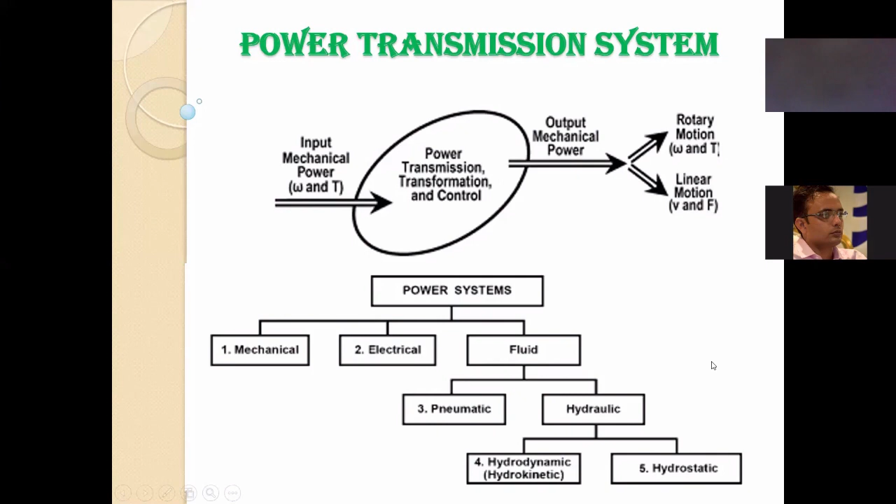We reach the differential, and from there the wheel turns. This is mechanical power transmission, from mechanical to mechanical.

We are getting mechanical energy by combustion of fuel in the internal combustion engine, getting power which rotates the wheel, and we get mechanical motion. We are getting rotational motion, and in the engine we are getting reciprocating motion.

Power is inputted and we get mechanical output through this. So power is transmitted this way, completed totally with mechanical power. This transmission of power is called mechanical power transmission.

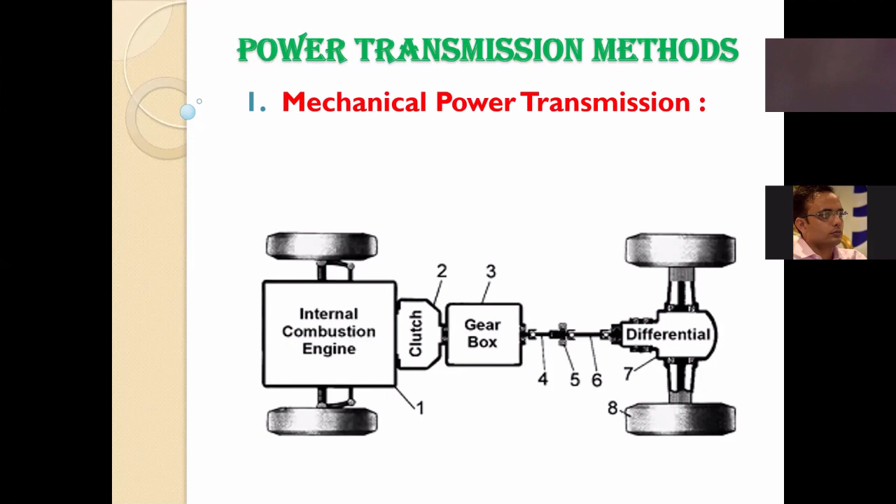Most of us as participants know about what happens in a power plant. After generating power in the power plant, electricity is generated, then transmitted to other sources via wires and power cables, entering into the industry or any powerhouse.

From that electricity we rotate a generator, we rotate a motor, and from that electric motor we do some mechanical work. So from electrical power energy we get mechanical energy.

Power is transmitted through various processes, from electric motor, from electric generator, transmitted through cables and enters your factory, and from there into your electrical motor, then transmits to the machine, and you get some mechanical work. It may be rotational or reciprocating.

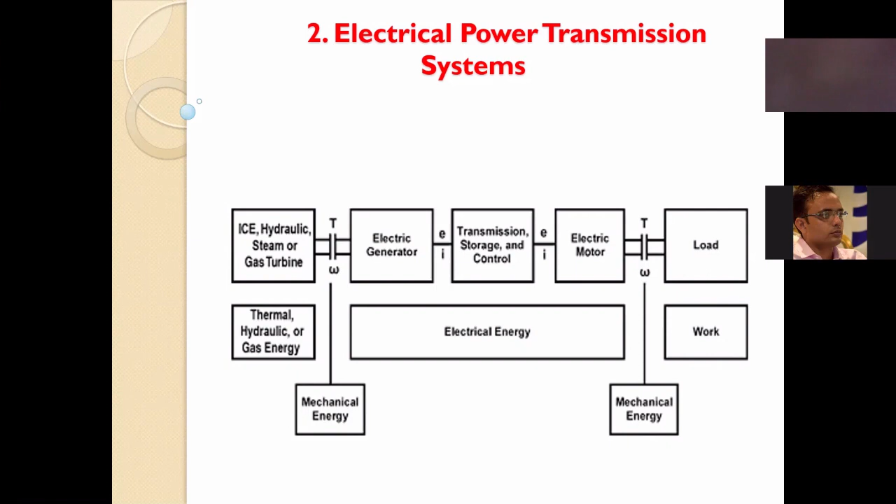This is the transmission of electrical power system, from mechanical to mechanical but via electrical power system. So next one, please.

Then the cylinder moves, giving mechanical work to lift some load, or some rotational motion like a drilling machine, pneumatic drilling, pneumatic brake. So it is doing some mechanical work, but what medium are we using? Air. Air is our main medium.

In the case of the hydraulic system, we are using a hydraulic pump. The rest of the things are the same, but the content of the system has changed from air to hydraulic oil. For oil we use a pump, and for air we use a compressor. So here the electric motor is the prime mover. The motor gives the prime rotation, then we pressurize the fluid.

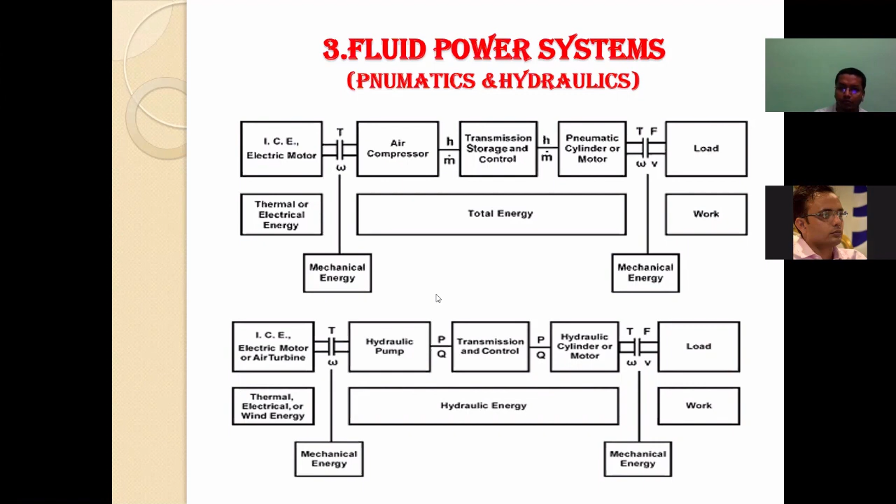Next slide please, sir. Okay. Previous, sir. Okay. So, next one.

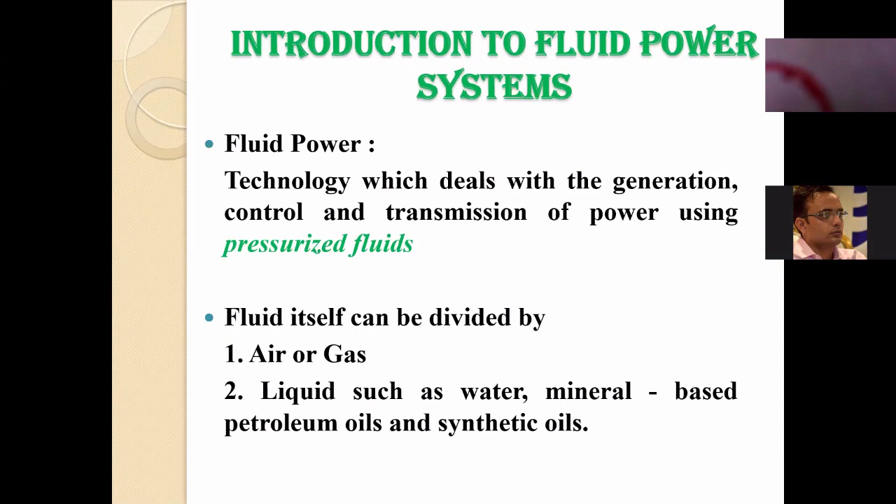Now, which law is behind this fluid power system? We all know Pascal's law. Each and every one knows Pascal's law. We all know pressure: pressure equals force per unit area. So what force is exerted by the fluid? Pressure into area. These basic things, basic physics, basic theory, are behind the fluid power system and its applications.

The third year students also know Bernoulli's equation. Our second year students will study Bernoulli's equation next semester. Pascal's law is familiar; every student is familiar with Pascal's law. It is a very common law. We all studied Boyle's law, Charles' law, Gay-Lussac's law, which are thermodynamic property oriented laws.

So we have to keep all this in mind when we study this subject. Like if pressure increases, does the velocity decrease or not? If velocity decreases, does the pressure increase or not? In these processes volume and pressure change, thermodynamic properties change with other properties. So these basic thermodynamics laws and fluid mechanics laws are very important prerequisites for this subject. So next slide, please.

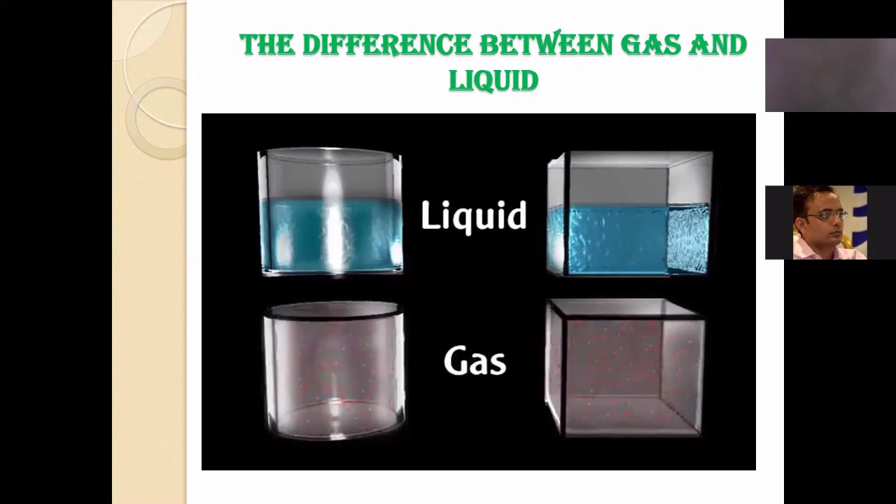So, fluid power system in our society. Fluid systems are basically classified in two types: one is fluid transport system and one is fluid power system. See, in your household, you are observing that you are pressurizing the fluid by using a pump. It takes it up into your roof tank, and then it is transmitted through the pipes and comes to your basins, toilets, kitchens.

So for this purpose we are only transporting the fluid. We are not applying the pressure of the fluid. But in case of fluid power system, we are converting the pressure of that fluid into useful mechanical work. So we are generating the power by using the pressurized fluid.

So the fluid system is classified in two types: one is fluid transport system and another one is fluid power system. So this is the basic root of fluid power system. Next slide, please.

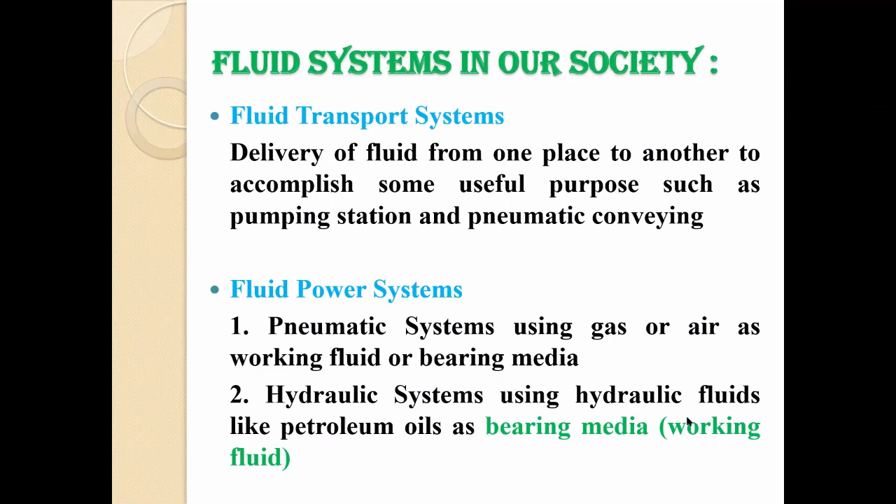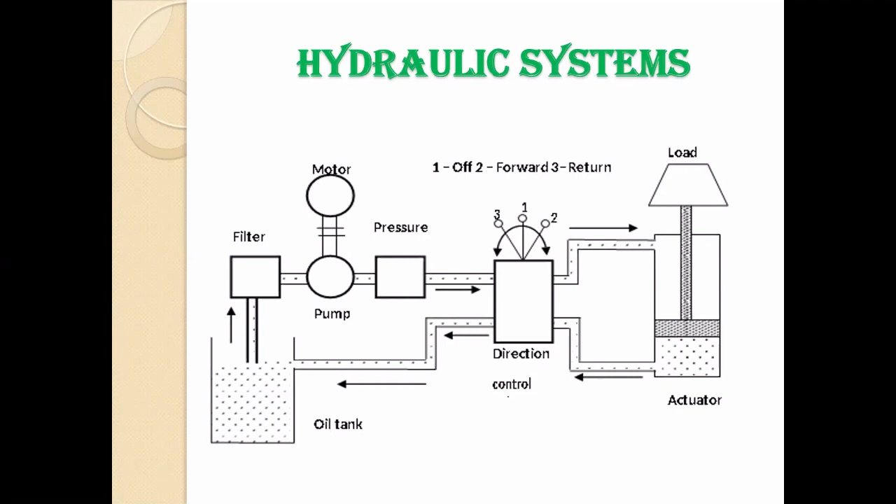So we already discussed the components of hydraulic system, that is the tank or reservoir to contain the oil. Then the pump. What is the function of the pump? The pump converts the mechanical power into hydraulic power, meaning pressurizing the fluid. Then the electric motor, this is the prime mover, which gives the preliminary power to the pump to rotate.

Now this is the main component of any fluid power system, whether hydraulic or pneumatic. The term is actuator. So what is the definition of actuator? Actuator is the component which converts the hydraulic power, meaning the pressurized fluid, into mechanical power to do some mechanical work. Examples are hydraulic motor and hydraulic cylinder.